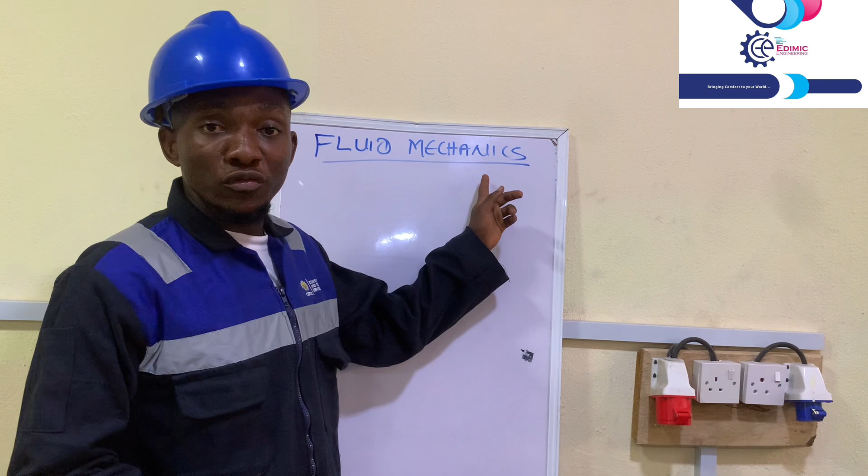So on today's class, we'll be talking about fluid mechanics. This happens to be a very important aspect of mechanical engineering. Fluid mechanics is very important, and you must consider fluid mechanics if you must be a successful mechanical engineer. So on today's class, we'll be talking and teaching about fluid mechanics.

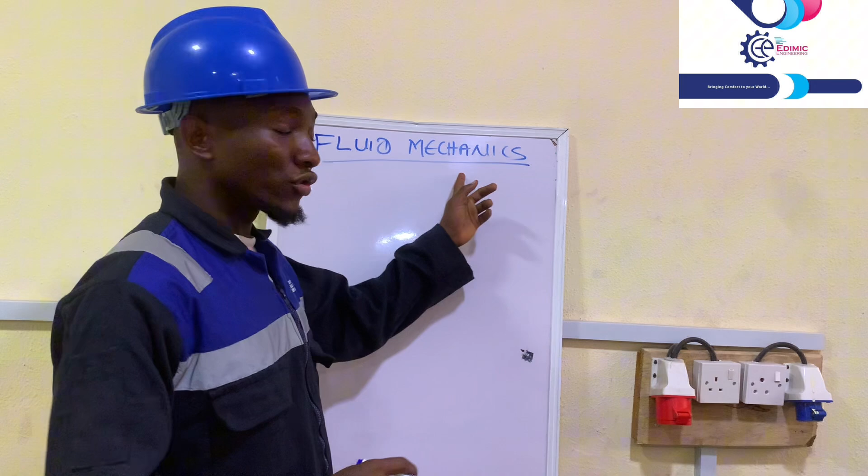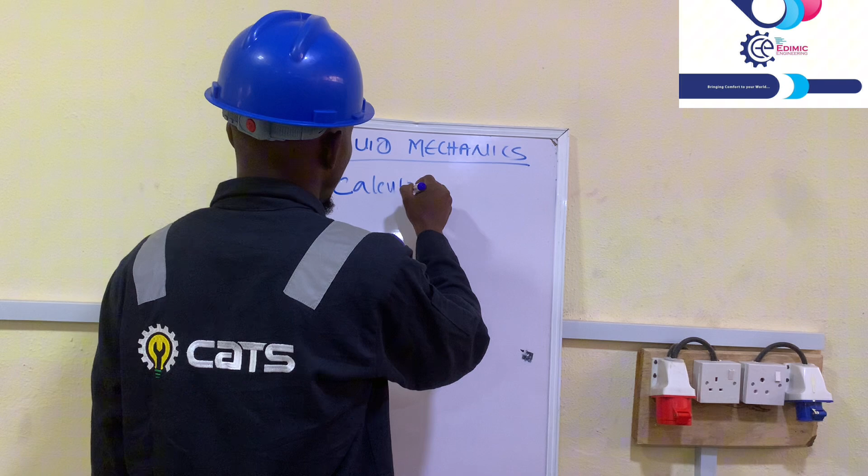But before we go into it deeply, I want to tell you the prerequisites, what is very important if you must scale through this topic and this course. There are things you must pay attention to, number one being calculus, which has to do with your integrations and derivatives. So if you must be a successful fluid mechanics engineer, you must know your calculus very well. That is a prerequisite that is very important if you must be a successful mechanical engineer and deliver this course, fluid mechanics.

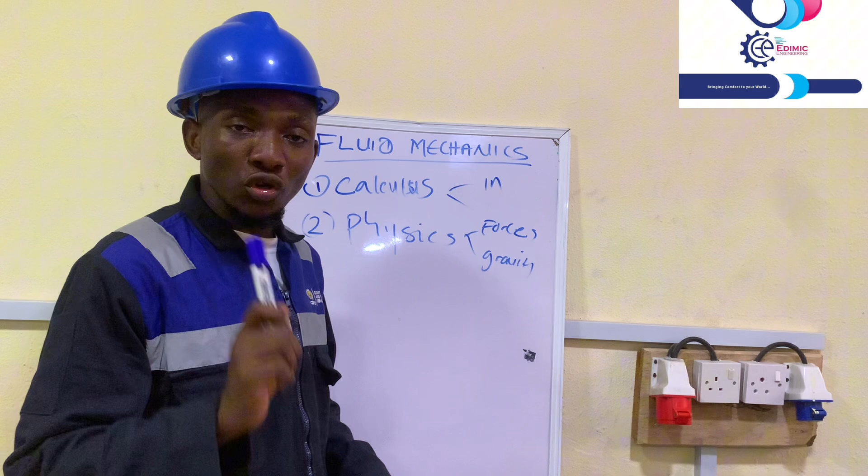Now the second one is your knowledge of physics. You must know it very well, which has to do with forces and gravity. So to be very competent and profound in the course fluid mechanics, you must ensure you know your calculus very well and you know your physics very well, which is the forces and the gravity. So I believe that is okay for us.

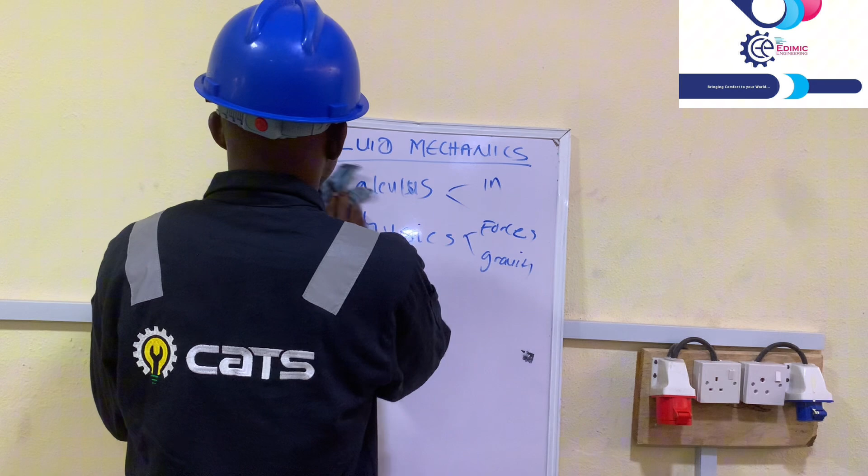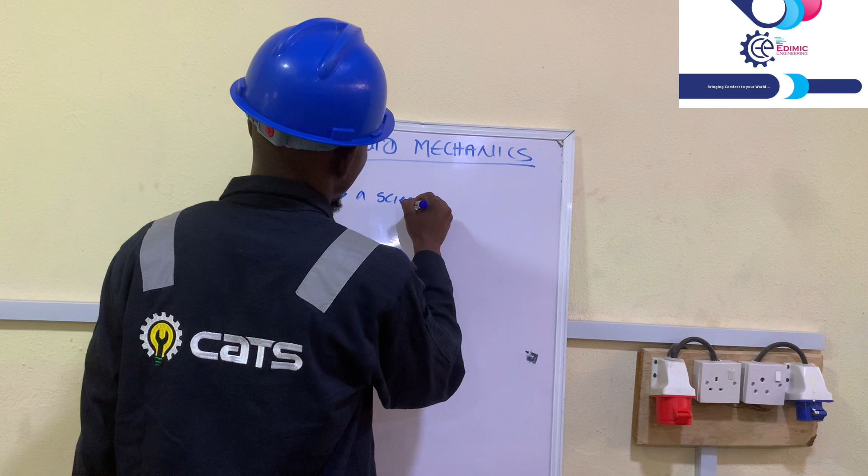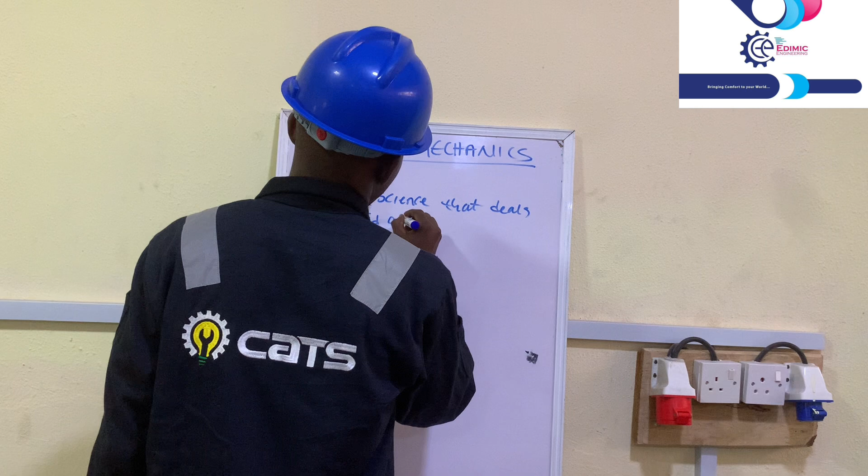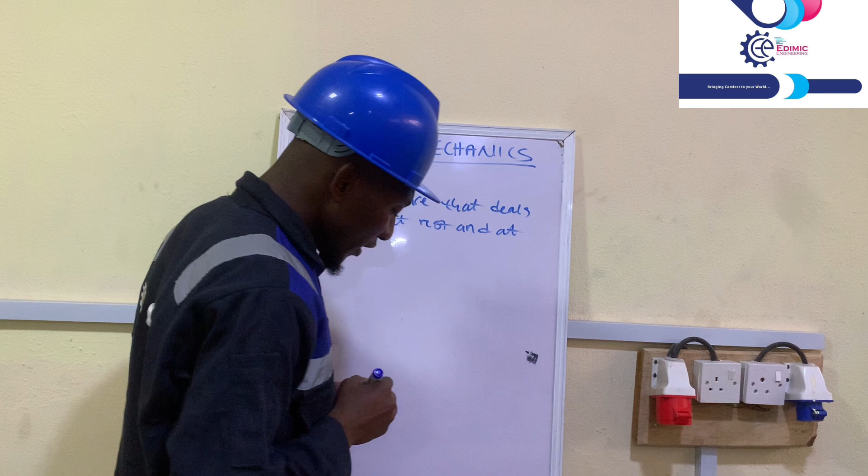So we'll go deeply into our main course for today, which is fluid mechanics. So now, what is fluid mechanics, as people may be asking? Fluid mechanics is a science that deals with fluid at rest and at motion. So it is very simple. When we talk of fluid mechanics, we are talking of a science that deals with fluid at rest and also when the fluid is in motion.

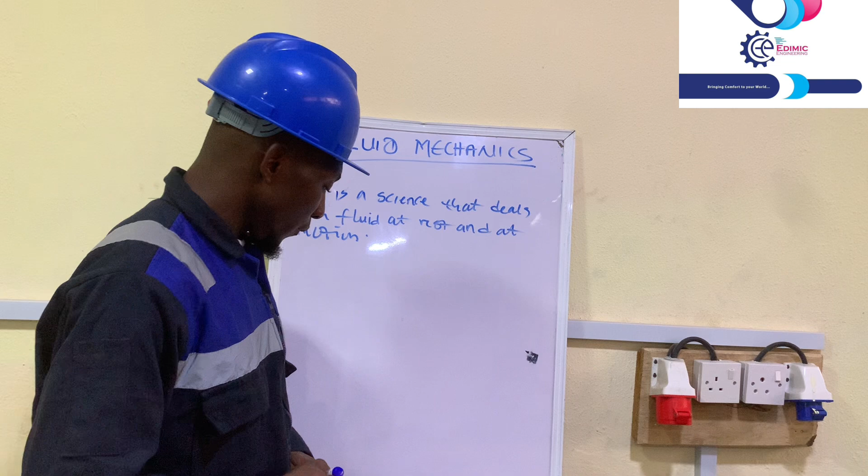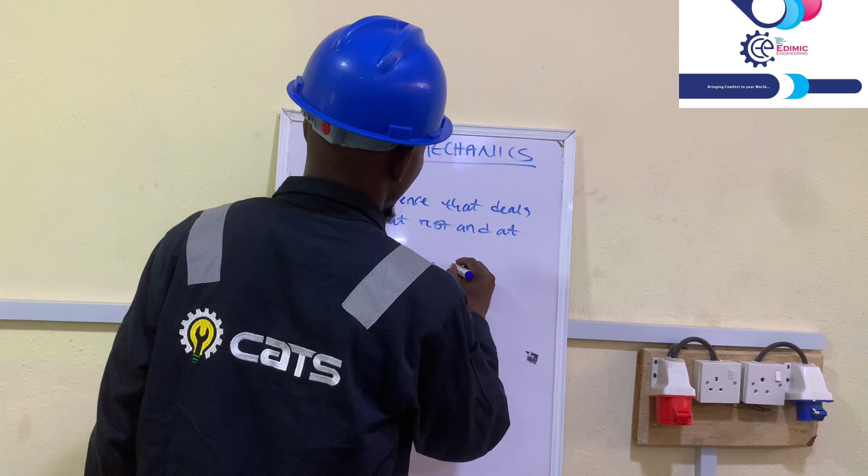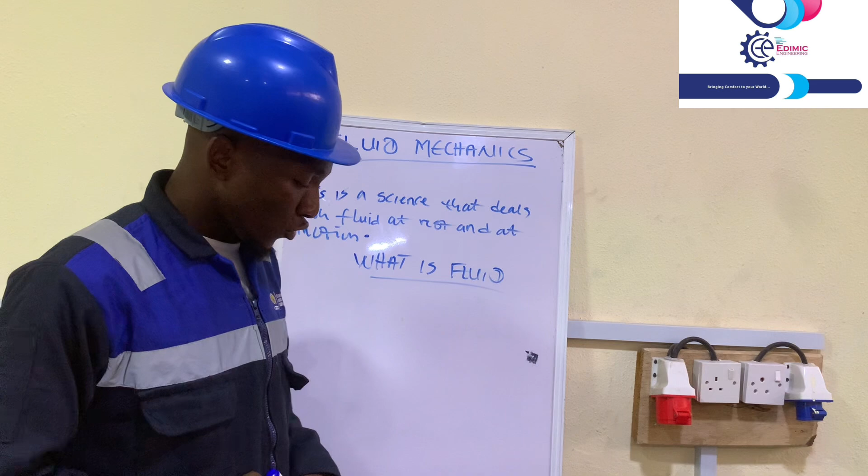So now, what is fluid? Fluid is defined simply, let me make it very simple: anything that flows is fluid. So don't take it to be very hard for you, it's very simple. Anything that flows is a fluid. So your water flows, that is liquid. Your gas flows, that is a fluid. Your oil flows, that is a fluid.

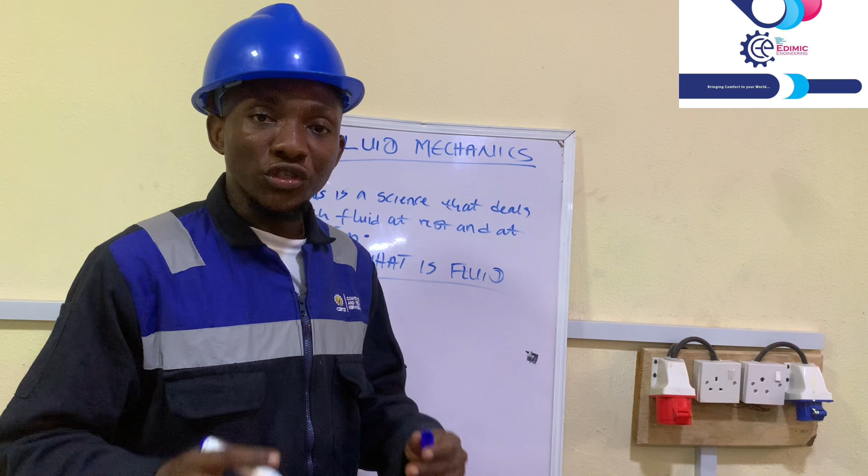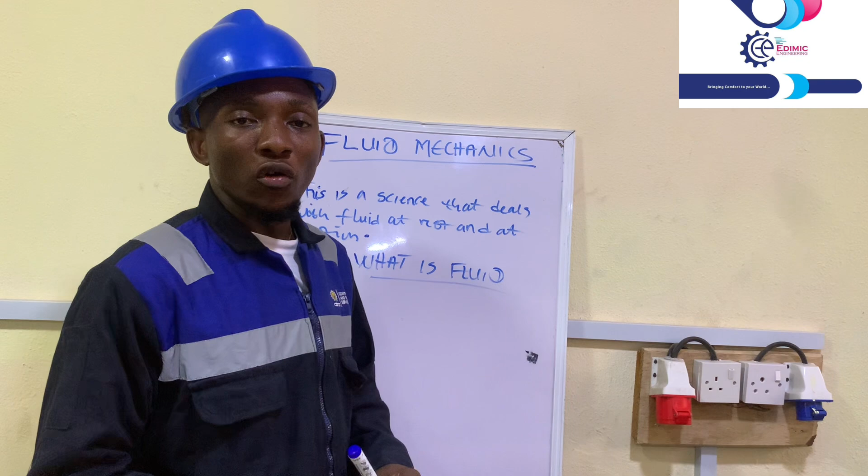So now, in the pure sense of engineering, fluid is any substance that deforms continuously under the application of a shear force. Fluid is a substance that deforms continuously under the application of a shear force. Now, irrespective of the size of the force, just a little force will deform a liquid.

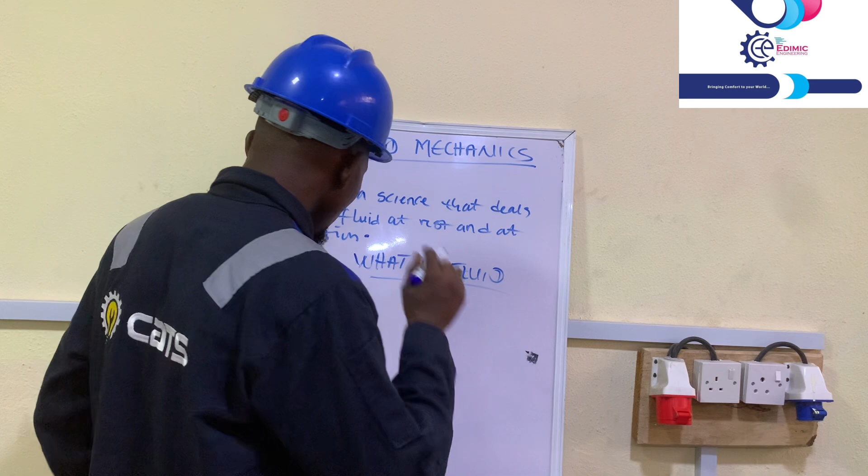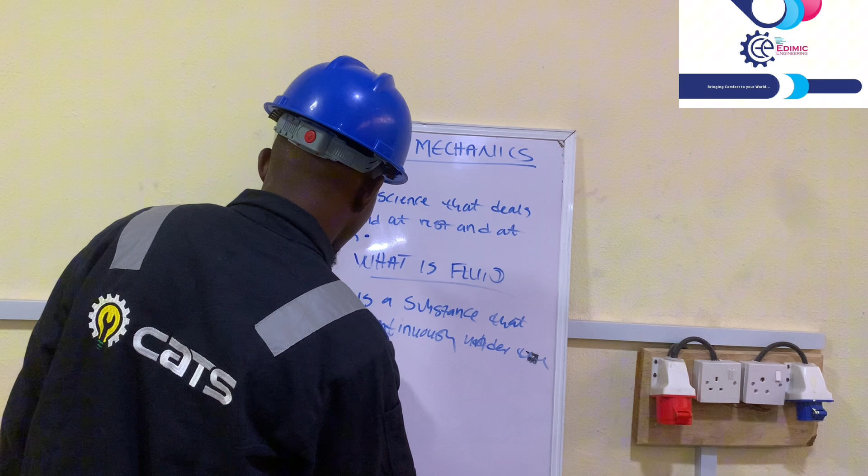So fluid is a substance that deforms continuously under the application of a shear force, of a shear stress, no matter how small the stress is.

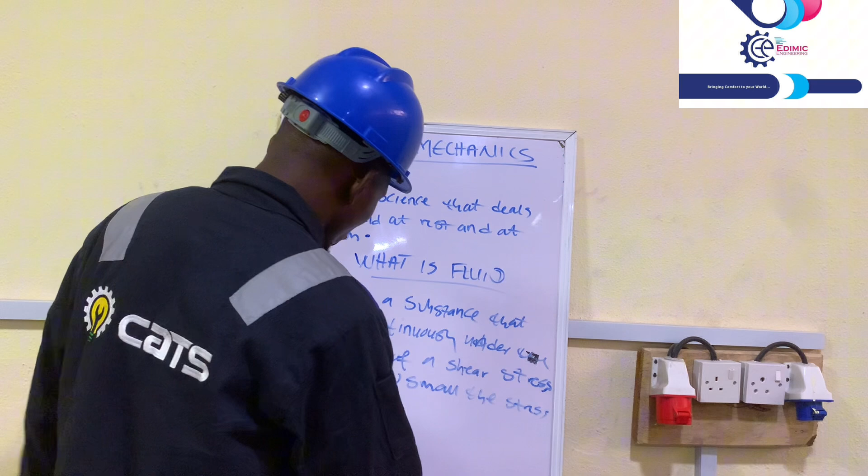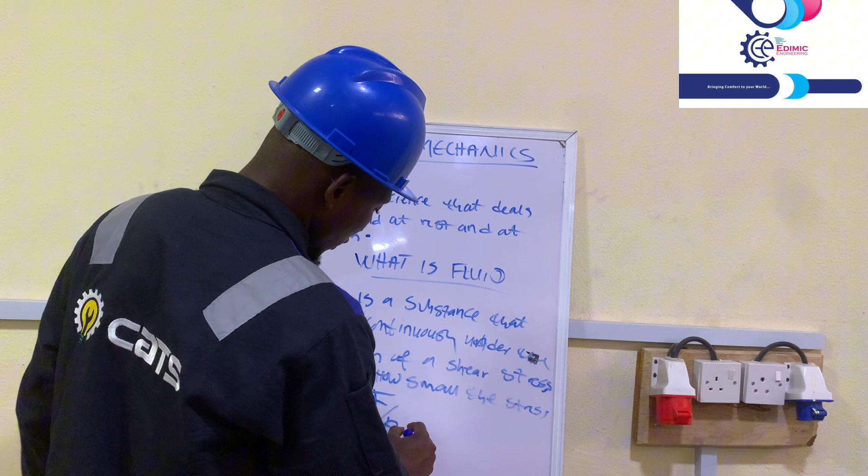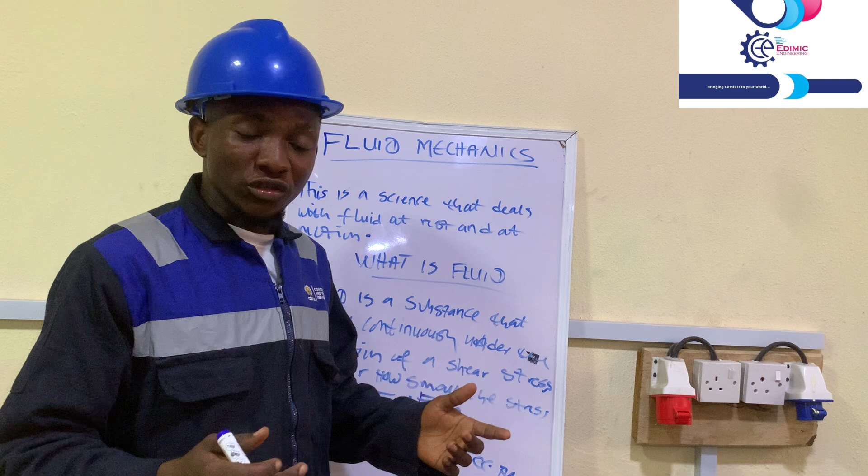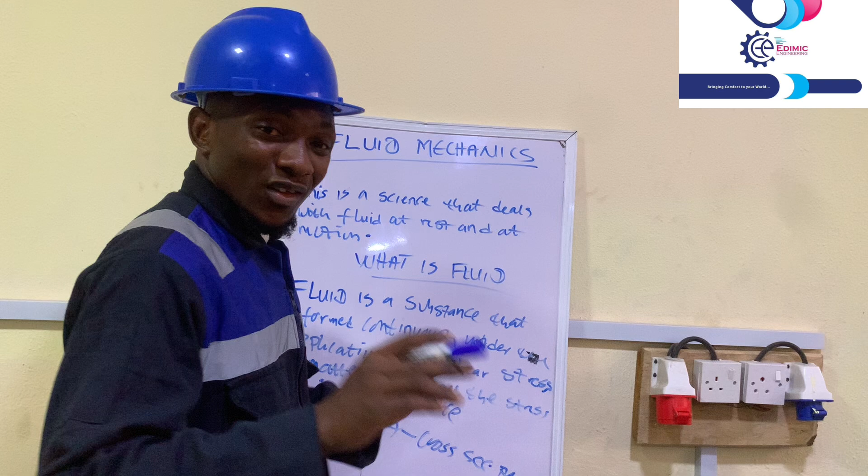So the stress we're talking about is very simple. Now you know stress to be force all over cross sectional area. So this is the stress we're talking about, force over cross sectional area, where F is your force and A is your cross sectional area. So fluid is simply defined as a substance that deforms continuously when a shear stress is applied. The stress you're talking about is just force over the cross sectional area. That is what fluid is, which is very simple for you to understand.

A substance that deforms continuously under application of a shear stress, no matter how small the stress is.

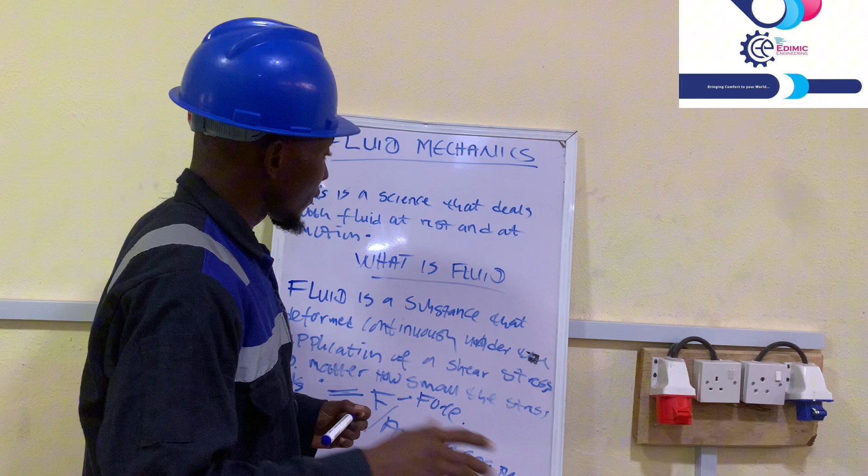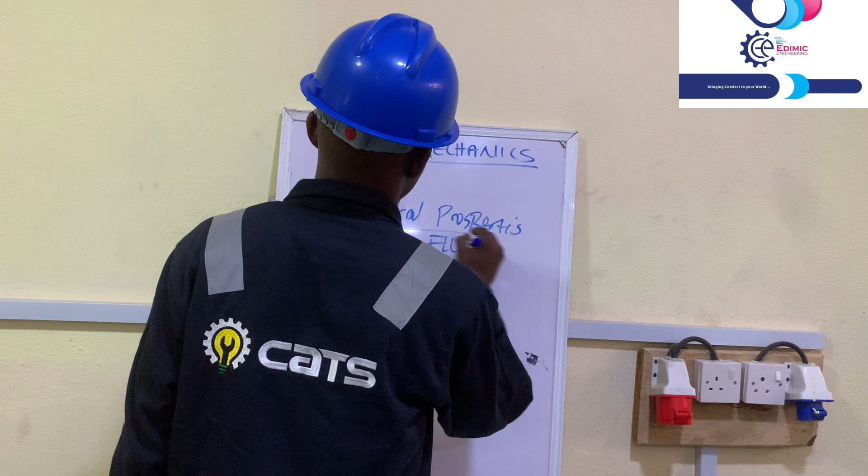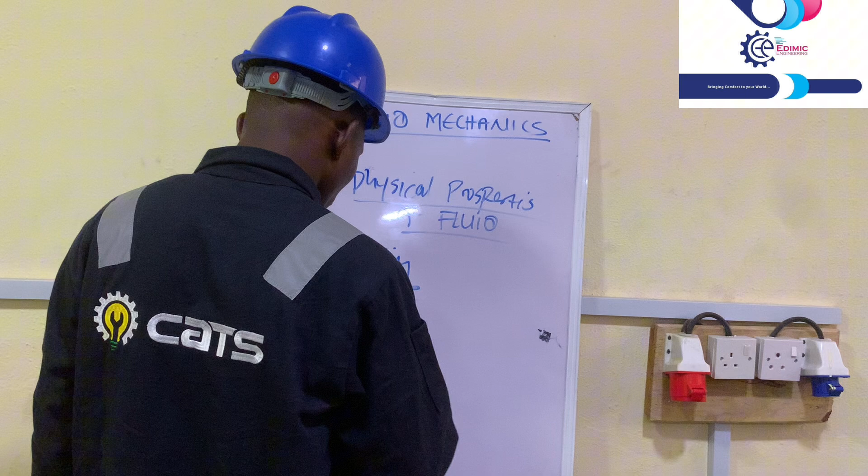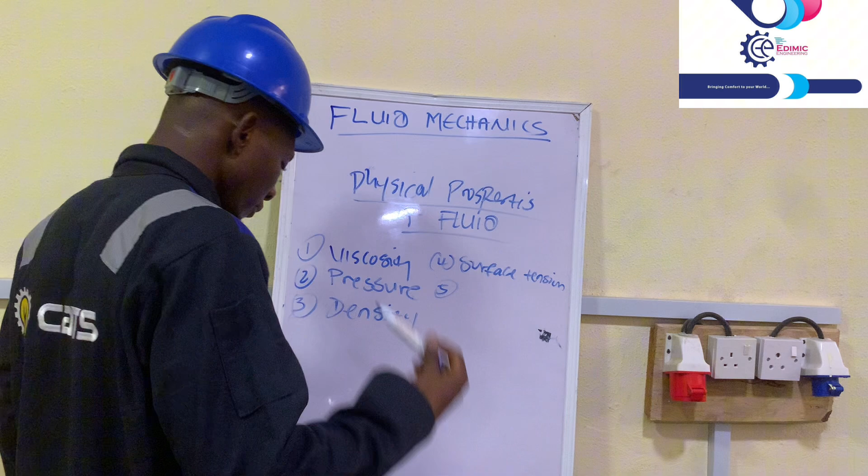So we'll go into the physical properties. Now, what are the physical properties of a fluid? Number two is pressure, so these are things you must put into consideration, the physical properties of a fluid. Number three is density, then number four is surface tension. Number five is specific weight. Every fluid has weight, so specific weight is considered one of the physical properties of a fluid. Then number six is compressibility.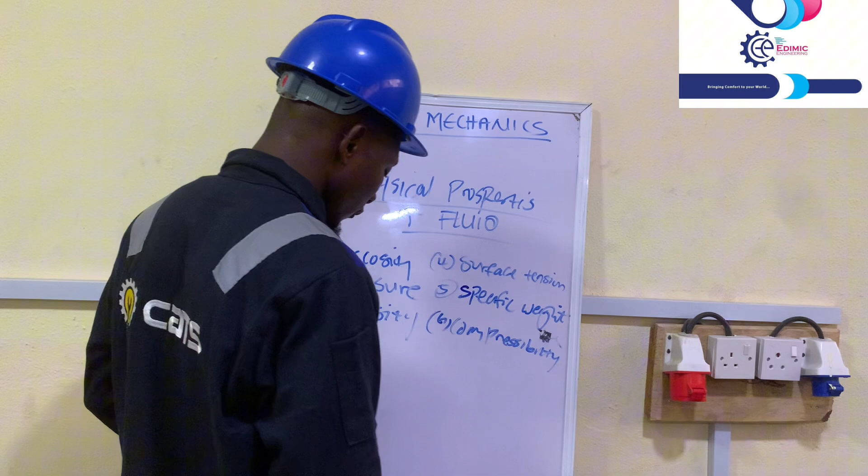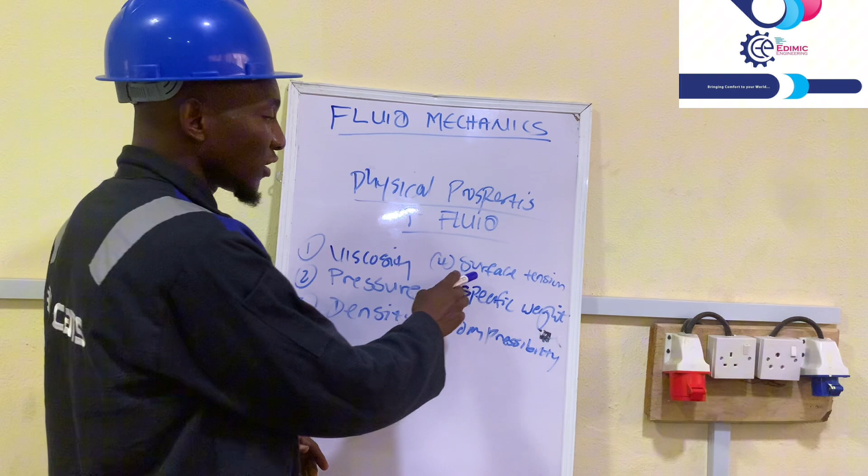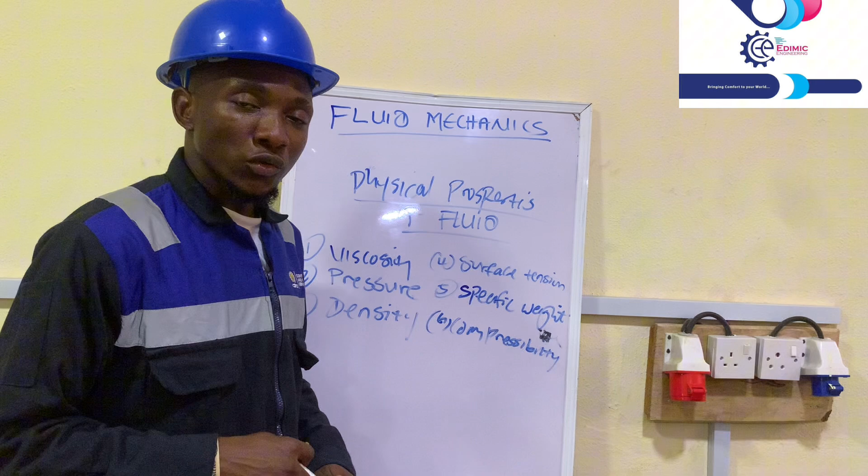So in our subsequent class, I'm going to ensure I bring this down to our understanding: viscosity, pressure, density, surface tension, specific weight, compressibility. So in today's class, I will not take us too far. I just want to enlighten us on the prerequisites for this course, fluid mechanics. So in our subsequent class, I'm sure I'll give you guys the best.